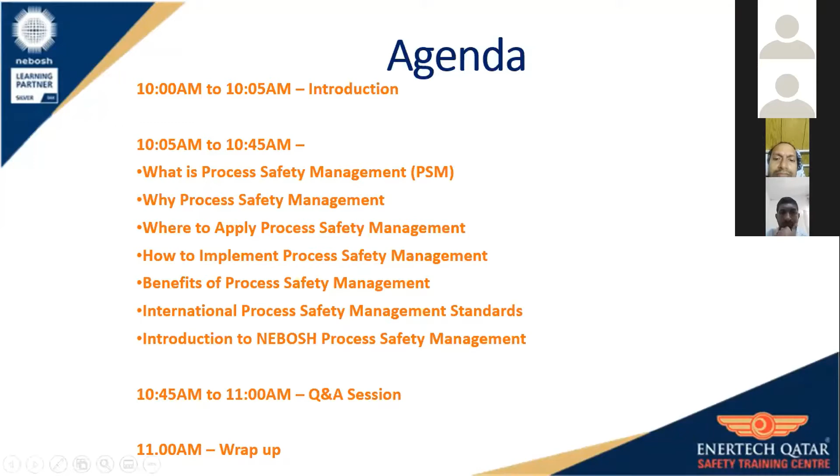Yeah, sure, thank you Aishwarya. I'll just share the presentation. Okay, can you see it? Yes, Mr. Dubal, we can see your screen. Okay, thank you Aishwarya, we will now start with the presentation on process safety management.

Let us start with a few questions of what, why, when, where on process safety management. We'll start with what is process safety management. First we must know what is a process. A process is any activity involving a highly hazardous chemical, including their use, storage, manufacture, handling, on-site movement, or a combination of these. So basically a process involves highly hazardous chemicals.

Next, what is process safety. Process safety is the safe operation of facilities that handle hazardous materials. These hazardous materials can create problems, they can cause fires, explosions, so we need to handle those plants very safely. That is all about process safety, to ensure these highly hazardous chemicals do not create problems like fires, explosions, toxic leaks, etc.

Next, let's come to what is process safety management. Basically, it is application of management principles and standards to identify, understand, and control process hazards. There are three stages: you identify the hazards, you understand them and the risk, and then control the hazards, that is, to reduce your risk and reduce the possibility of emissions happening in the facility.

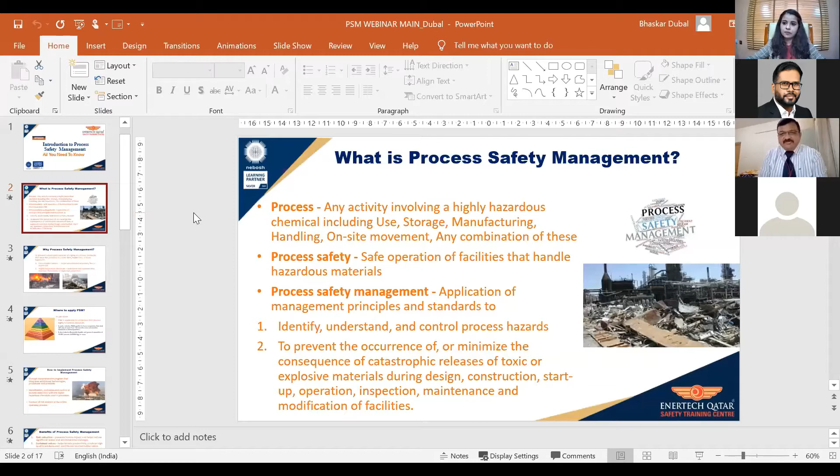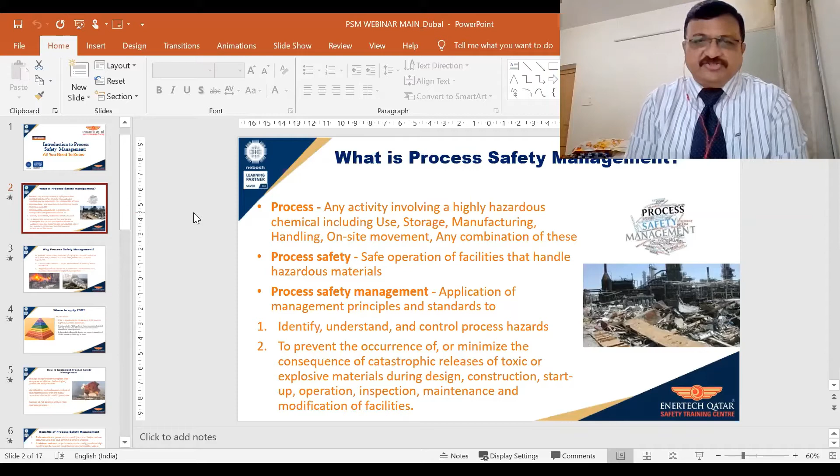So, or minimize the consequence of catastrophic release of explosive materials. This has to be applied in the entire life cycle of a plant or facility, right from design, construction, operations, inspection, maintenance, and also if you modify your facilities. That is all about what is process safety management.

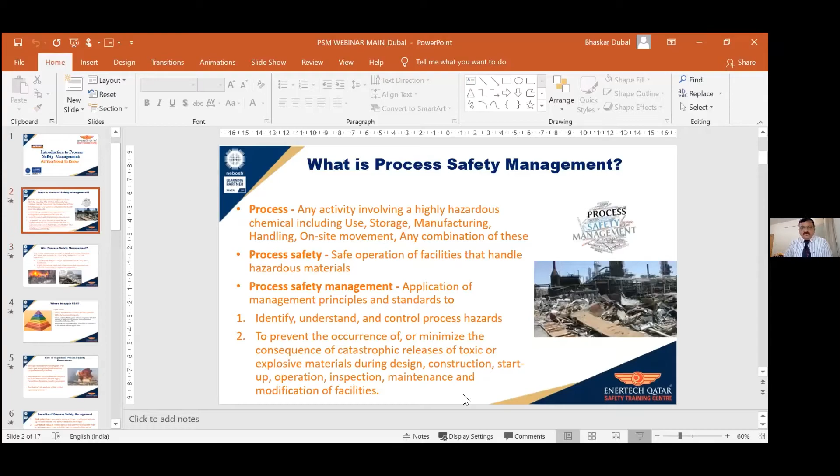Okay, now let's come to why we need process safety management. One minute, let me just fix this. I hope it's better now. What is process safety management?

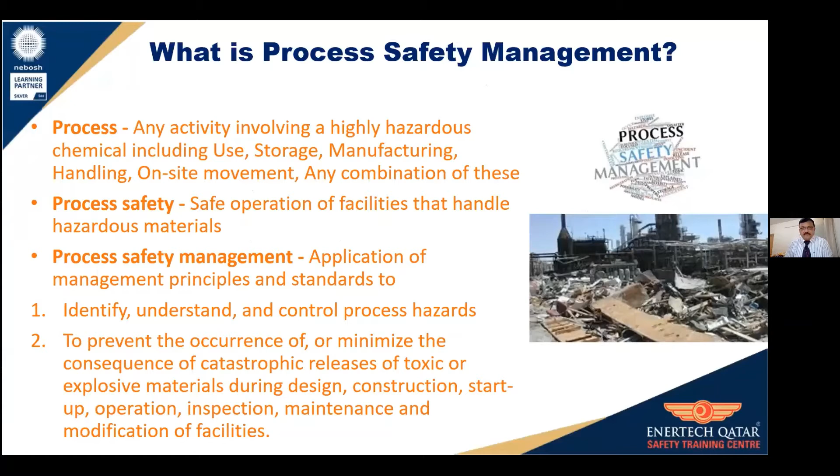To prevent catastrophic release of hazardous chemicals that have a potential to cause fires, explosion, or toxic exposures. We don't want any such releases because they could end up in fires, explosions, etc. Catastrophic is a major uncontrolled emission of fires and explosion - you're not able to control it. Highly hazardous chemicals are those substances that possess toxic, reactive, flammable, or explosive properties. This is just to understand why we have process safety management - we want to prevent catastrophic releases of highly hazardous chemicals which could cause fires, explosions, or toxic exposures.

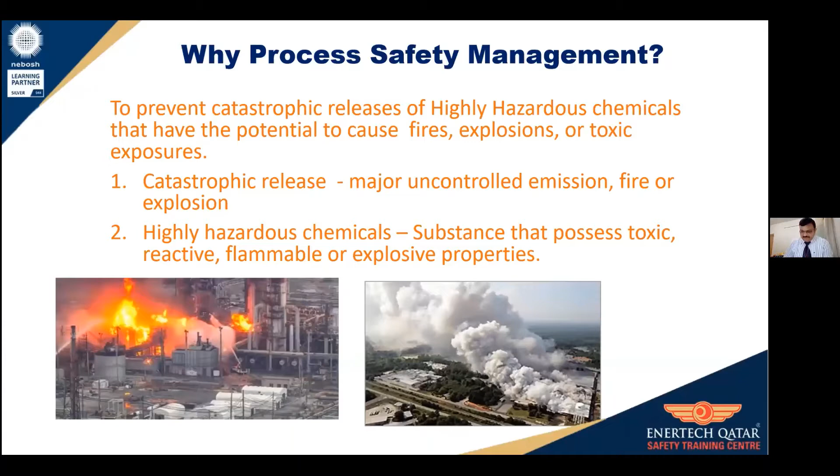Next, where do we apply PSM? OSHA is one of the main regulations followed throughout the world, one of the main PSM standards, because it is a very organized and proper system.

PSM is applicable to companies handling highly hazardous chemicals. In each industry, OSHA has a list of 130 specific toxic and reactive chemicals. If a chemical falls in that list, there is a threshold quantity specified, and if it exceeds that, PSM is applicable. Other than toxic and reactive chemicals, it also includes highly flammable liquids and gases, which, if they are more than 10,000 pounds or 4.5 tons, then also PSM is applicable. So basically, if your chemical falls in the OSHA list and exceeds the threshold quantity, or any flammable liquid or gas exceeding 4.5 tons, it will be eligible for application of PSM.

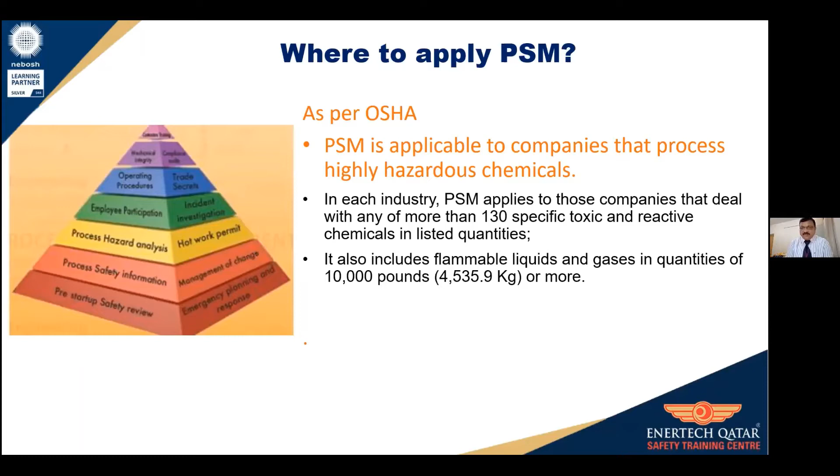Now, how do we implement process safety management? Basically it's a long process, but broadly it's a comprehensive program that integrates established technologies, procedures, and practices to identify, evaluate, and control the hazards with the highly hazardous chemicals used in the process. As I already said, we identify, evaluate, and control the hazards - that is part of the PSM implementation.

Further, once you identify the hazards, you have to conduct a risk analysis to understand the risk level of these chemicals - are they very high risk or low risk? Low risk you can manage with procedures and training, but high risk requires solutions to reduce the risk to a reasonably acceptable level. So that's a brief outline of implementation: identify the hazards, do the risk analysis, and have control measures to reduce the risk to as low as reasonably practicable and acceptable.

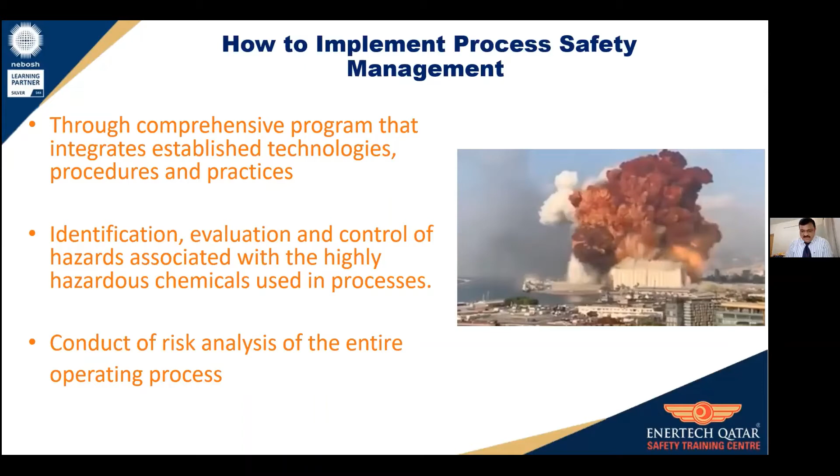Next, what are the benefits? Benefits can be classified into three categories. The first one is risk reduction, obviously, because one of the main purposes of process safety management is to reduce the risk. Once you reduce the risk, you prevent human injury, reduce losses due to damage, and also environmental damages. So that's the first part - risk reduction.

The next is sustained values. It helps boost your productivity and improve product quality, and also contributes to better shareholder value, because once your company is more efficient with better quality due to no accidents and proper training, you have better shareholder value.

It also supports other management systems. Now we have ISO 45001 health standard, ISO 14001 environment standard, and RC 14001 which is Responsible Care. Once you implement process safety management, it will be easy to implement these, because some elements are common between these systems. PSM is one of the elements in RC 14001 - Responsible Care's main elements include PSM. So that is how it helps in implementing other systems like ISO 45001, 14001, and RC. These are some of the benefits of process safety management.

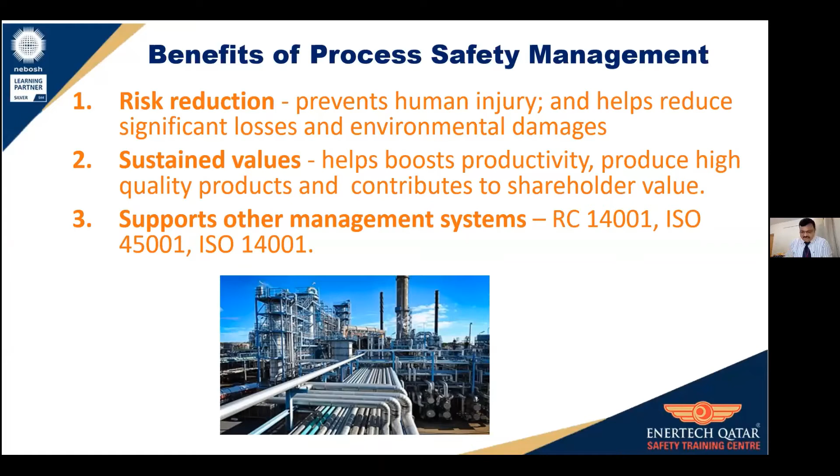Now, normally we have two international standards which we follow throughout the world. One is the OSHA standard - Process Safety Management of Highly Hazardous Chemicals Standard, numbered 29 CFR 1910.119, since OSHA has hundreds of standards and this number specifically deals with process safety management. It has 14 elements, and in NEBOSH all the elements are covered in some way. We also have the CCPS, Center for Chemical Process Safety, which has risk-based process safety with 20 elements.

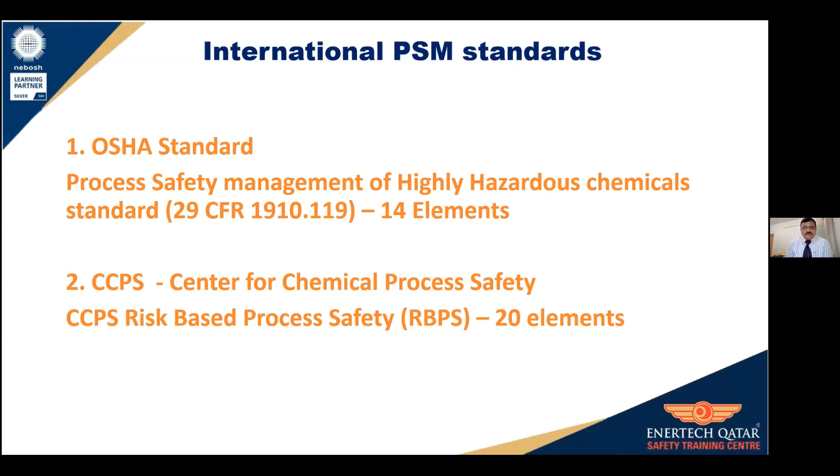So there is some difference between these two, 14 and 20 elements, but the 14 elements are the major ones which are used in most of the industries. Okay, so that is about international process safety management standards we use. So this is all about briefly about PSM, why, where, how, etc.

Now let us come to the main certificate program, which is the NEBOSH HSE Certificate in Process Safety Management. Now in this, what are the benefits of doing this certification course?

This qualification is designed to provide the following benefits to the delegates. It provides a broad understanding of the accepted principles and practices for the management of process risk, and will ensure that they can recognize and contribute to the control of process safety hazards. So the delegates would be in a position to identify the hazards and provide control measures to reduce the risk to a tolerable level, and also provides a broad understanding of the general acceptable principles and industry practices for the management of process risk. So this is something about the benefits of doing this course.

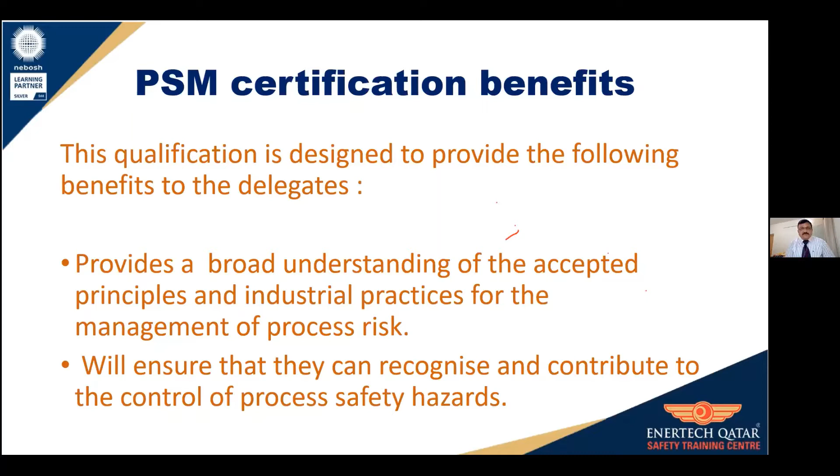Who will benefit? Now, employers will benefit as well as employees. All companies working in industries like oil and gas, chemicals, plastics, pharmaceuticals, etc. will all benefit from this process safety management. This system is effectively used to help keep people safe from injury and loss of life, and protect valuable assets to avoid prosecution and loss of reputation. So this is how it will benefit the employers who implement this safety system in their industry.

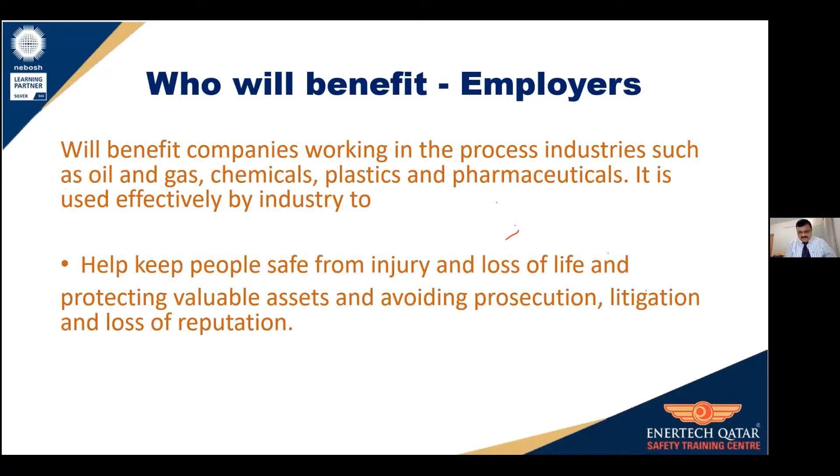Now, employees. Who will benefit among employees? All operation personnel who work in the process industry, such as oil and gas, chemicals, plastics, pharmaceuticals, will definitely benefit a lot. Similarly, it's also ideal for managers, safety representatives, and health and safety advisors working within the process industries.

So it's related to the operation point of view, but it's not designed for chemical and process safety engineers experienced in specification—those doing the design of a facility, the maintenance of a facility, or prescribing specifications for a facility at the design stage. It won't help them deal with hazardous chemicals which can release and cause toxic damage, etc., because they're just in the design stage.

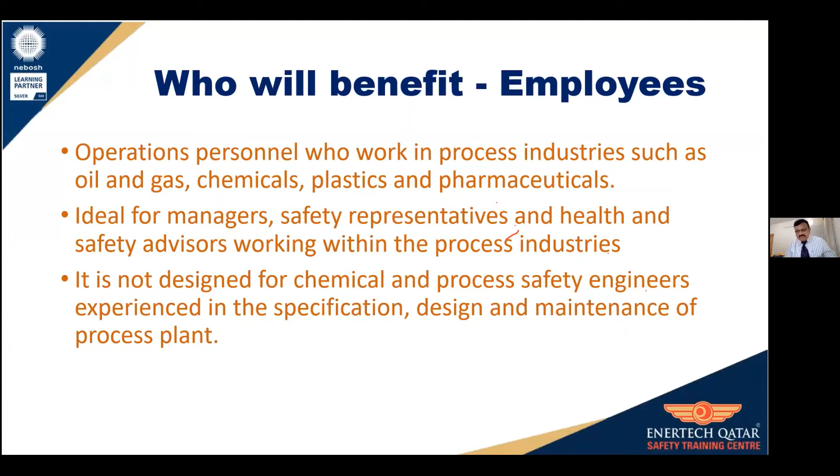This is basically meant for people who are really at the work site and who are handling those chemicals in the facility, and also those responsible for fire and safety, like managers, safety representatives, and health and safety advisors. But if someone in an engineering company, like a design HSE manager, does this course, it will be beneficial, but he will not be able to implement it because he's just in the design office, not working at the plant. So that is the benefit of this one.

Now, just a little about this course, and then we will go into briefly what this course contains, what are the elements, and what all items are covered, so you'll come to know how in-depth the course is. So we'll first cover briefly about the course. I'll run through very quickly.

Eligibility, basically: if you have knowledge of health and safety issues, it would be advantageous to do this course. Like if you have already done a NEBOSH IGC for occupational safety and health or some other related HNC course, you'd have a basic concept of health and safety issues in highly hazardous industries. That would help. Or if you're dealing with chemicals, etc., that would also help.

Next, the number of training days is 4 days of training, and the exam will be 90 minutes, with 40 multiple choice questions. Pass mark is 60% in the exam, which is 24 correct questions out of 40. That is the passing mark. The certificate will be issued within 20 days of result notification.

So that is just briefly about the course. It's a 4-day course, and you will have an exam with 40 multiple choice questions. Pass mark is 60%. So that is just about the NEBOSH course.

Now we'll see what this training program really contains, and the bases to understand the depth of the training program. Okay, now the first element is process safety leadership.

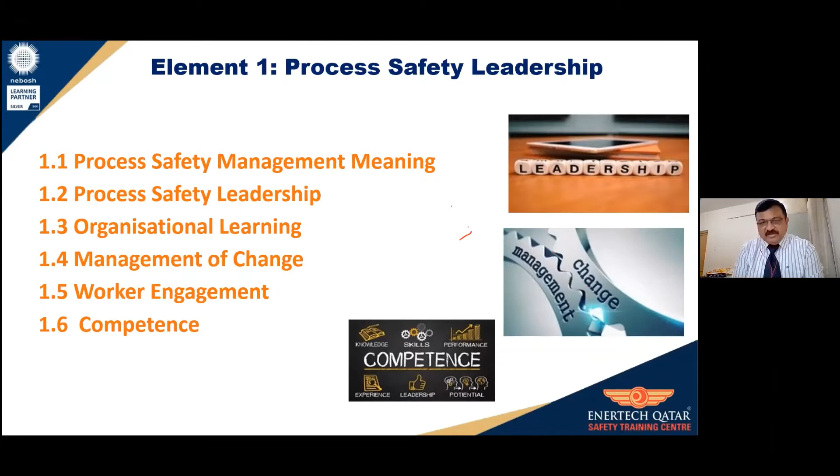Now, worker means all employees. It doesn't mean just the worker, it means the management as well as the worker staff. This will outline the benefits, limitations, and types of worker participation and engagement. That means you can engage your staff in accident investigation, in training, when introducing new technology, when commissioning startup. So many avenues are there related to PSM where you engage your worker.

Next is the last one in this particular section, competence. What is competence? Competence is a combination of skill, experience, and knowledge. This chapter will outline what is meant by competence and its importance to process safety.

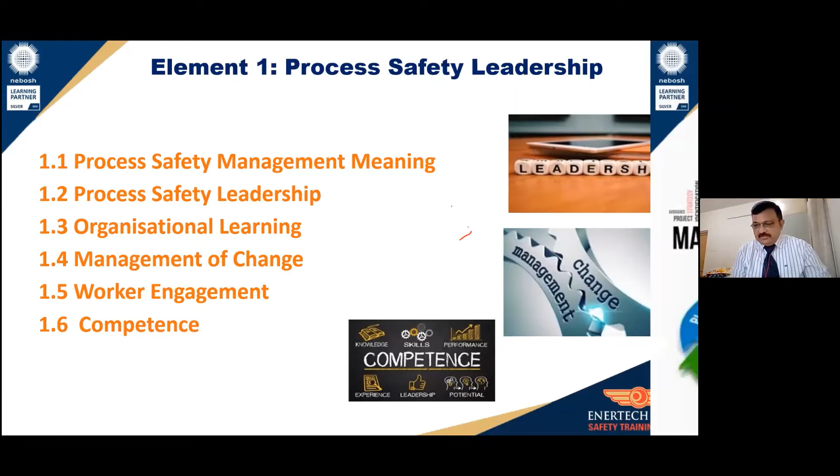So we have just covered the first element. Let us go to the second element: management of process risk.

The first chapter in this is establishing a process safety management system. We have already seen why we have to establish the system, and this chapter will outline the purpose and importance of establishing a process safety management system, and also go into the details of the key elements of the process safety management system, like OSHA's 14 elements, most of which are covered here.

Next, risk management techniques used in the process industries. This section will outline common risk management techniques used in the process industries. Now, what is risk? Risk is the likelihood that a hazard will cause harm in combination with the severity of the consequences. Basically, we can always say it's a multiplication of the probability and severity, or the likelihood and severity. So it's the combination of these two: how likely the hazard can create a problem, and what is the severity if it really causes a fire or accident.

So we do the risk analysis to identify the hazards, evaluate the risks, and establish controls to reduce the risk to as low as possible. So we need to have some management techniques to identify the hazards. The famous technique used is HAZOP study, which all of you are aware of. Other techniques also covered in this include HAZID, FMEA, ETA, etc.

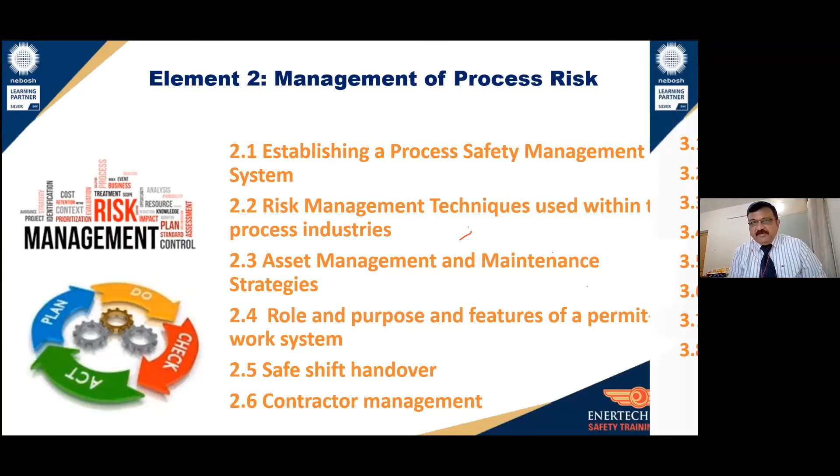Next, we will go to element number 3. This is called process safety hazard control. Under this, the first one is the operating procedures.

For every plant to run, you cannot run the plant without operating procedures. You need to know how to run the plant, and you need to have operating procedures for startup, for shutdown, for emergencies - all types of situations. You need to have operating procedures.

So this chapter will explain the purpose of standard operating procedures, or SOPs, the types of SOPs to be handled and written down, and what should be included in the SOPs is also covered. We'll also understand how to maintain the SOPs current, and the limitations of the SOPs.

The SOPs have to be current, and as per OSHA, every year you have to ensure that your SOPs are current, because you operate procedures during the year, and if you don't alter your safety procedures, if somebody follows the same old procedure, it could lead to accidents. So SOPs are maintained current on a yearly basis.

Safe startup and shutdown - this will explain the various types of startup and shutdowns, and includes a list of items to be covered in a pre-startup safety review. Be it a new plant or a modified plant, you need to have a pre-startup safety review, which we call PSSR. It also includes items covered in that and gives you an idea of that.

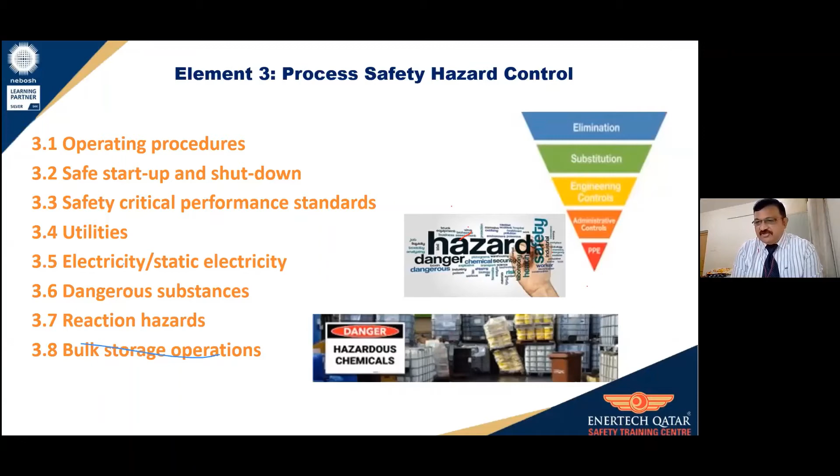Okay, let's continue. Reaction hazards. This section will cover the types of reactions and the causes and consequences of runaway reactions. A runaway reaction is one which we have no control over, and could lead to major issues. These are mostly in polymerization plants where you lose control and the rate of reaction increases with the temperature, etc.

Bulk storage operation. Now, as industries are going to large scale, bulk storage operation is becoming very critical because we have huge inventories. So bulk storage operation covers the risks related to storage tanks, like overfilling, effects of vacuum, and failure modes of tanks and tank shells.

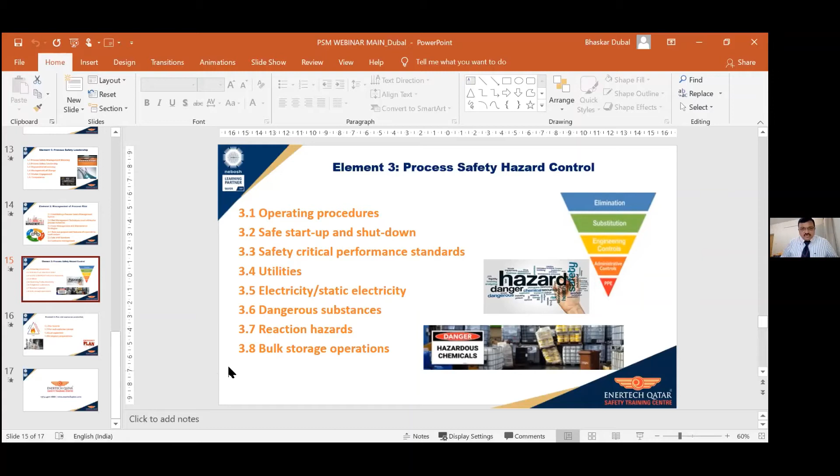Further, it will cover how to site the storage tanks and also warehousing management. If we store hazardous chemicals in a warehouse, we need to take proper precautions, so we need to know how to handle those. That is also covered in the bulk storage operation chapter. So that is as far as element 3 is concerned.

Now the fourth element is about fire and explosion protection. We know sometimes fires are inevitable and we cannot really stop a fire from happening, due to so many reasons - due to a neighboring plant on fire, or due to something else. So once we have fires, we need to fight the fire and somehow reduce the consequence, mitigate it so that damages are less and people are not injured or killed. For that, there are some principles and understanding we need to have of how we fight fire and what the fire hazards are, which are covered in this section.

So let's start with the fire hazard. The first chapter is fire hazard. This explains the fire triangle and how fires are caused - we have the 3 elements already seen on screen - and the typical ignition sources, since ignition source is one element of the triangle. If you isolate the ignition sources, half your job is done. Once you identify them and eliminate or somehow control them, that will help you prevent some fires. It will also cover the mechanism and consequence.

There are many types of fires - we have jet fires, pool fires, flash fires, and vapor cloud explosions. So we'll understand the mechanism of them and what can happen if they really let go, and the consequences from them.

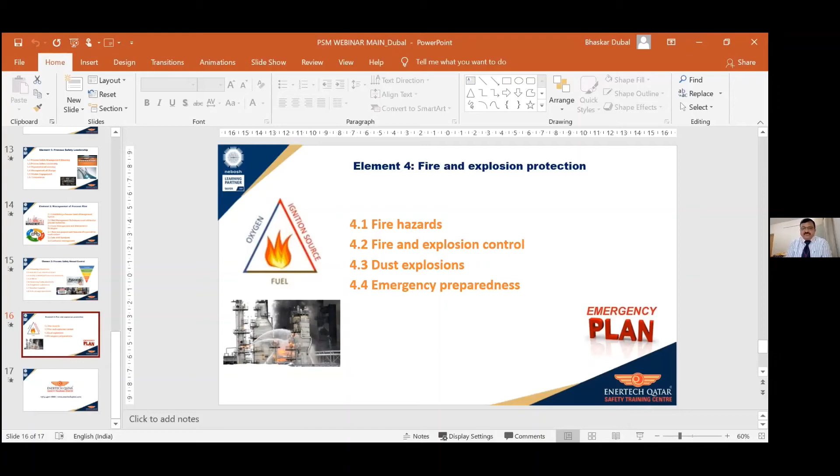So this is just briefly about what this course covers, without going into the details of them. I think with this, I have completed my presentation.